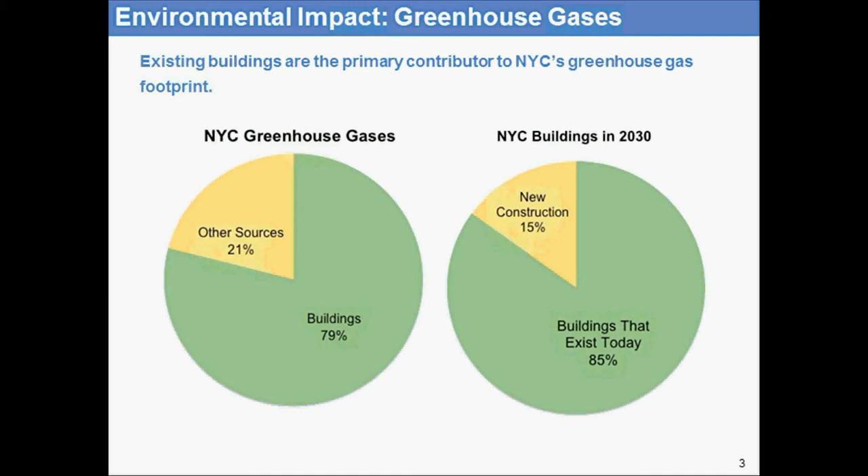Now, as for Clean Heat, the New York City Community Air Survey in 2008 discovered that eliminating number 6 and number 4 heavy heating oils is one of the highest impact strategies we can undertake to improve New York City's air quality. Now, to put this in a little bit of perspective, the soot pollution, or the PM 2.5 emissions, from just the 1% of buildings in New York City that still burn heavy fuel oils is equivalent to all the car and truck traffic emissions in the city. So really, this is public health and well-being that's at risk when we burn heavy fuel oils.

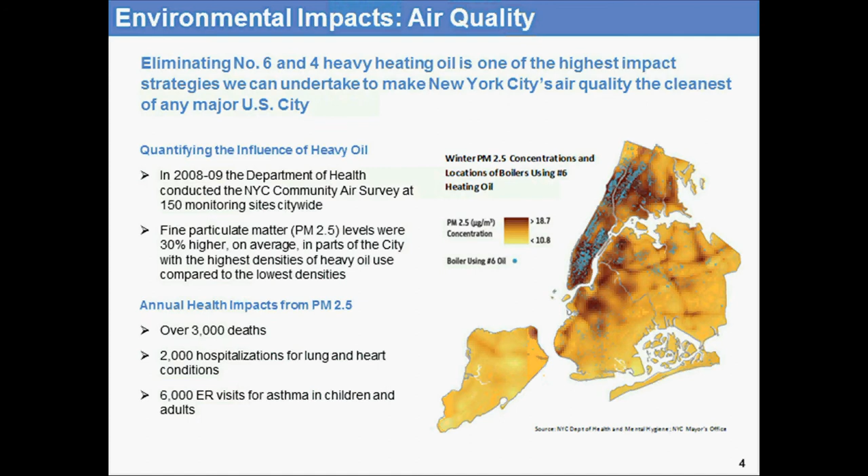So now we're going to get into a little bit more specifics about what Local Law 87 and the Clean Heat laws are. Local Law 87 is part of a package of 4 laws known as the Greener Greater Buildings Plan, which were enacted in December 2009 to improve the energy and water efficiency in New York City's largest buildings. In order of compliance timeline, these laws include Local Law 85, New York City Energy Conservation Code, for all new projects breaking ground starting in 2010. Local Law 84, the benchmarking law, which requires buildings to annually report their energy use. This started in 2011. Local Law 87, the Energy Audits and Retro-commissioning law, which we'll be talking about today. First compliance year is this year, 2013. And finally, Local Law 88, which is about lighting upgrades and sub-metering, which requires compliance by 2025.

So what exactly are the Energy Audit and Retro-commissioning? An energy audit is a systematic analysis of a building's energy equipment and its systems, envelope, and operation, which identifies cost-effective opportunities to save energy. Local Law 87 requires the energy audit, but does not require property owners to follow the recommendations in that audit. The energy audit is going to include interviews with operating personnel, review of utility bills and other operating data, and detailed analysis of energy consumption for all base building systems.

Retro-commissioning, on the other hand, is the testing and tune-up of existing building systems to confirm that they're operating as they should be and in the most efficient manner possible. The retro-commissioning will identify maintenance, calibration, and operations errors that are easily corrected and typically add up to significant energy savings, as well as improve equipment reliability. Local Law 87 requires the retro-commissioning as well as fixing any deficiencies found in the retro-commissioning. In order to meet the requirements of Local Law 87, you have to file an energy efficiency report that includes both the energy audit and the retro-commissioning report.

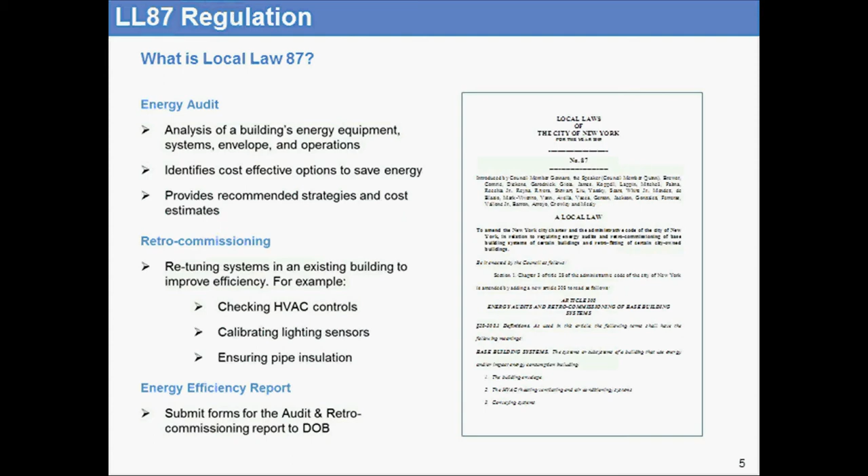Great. So we've talked a little bit about the health impacts of heavy fuel oils. So to respond to this and to balance those health concerns with cost minimization for the buildings that are burning these heavy fuel oils, DEP is phasing out heavy oils in 2 stages. The first stage started last year in July and is focused on number 6. So DEP no longer approves certificates of operation for number 6 systems. That means that no new systems burning number 6 can be permitted at all. In addition, these permits cannot be renewed for existing number 6 systems. So over the next 3 years, as these permits come up for renewal, these buildings will have to move to a different fuel. They can no longer burn number 6. Now, phase 2 really focuses in on number 4.

Number 4 will be completely eliminated by 2030. The permits will not be renewed. But another thing to note here is that it's 2030 or whenever a boiler or burner needs to be replaced.

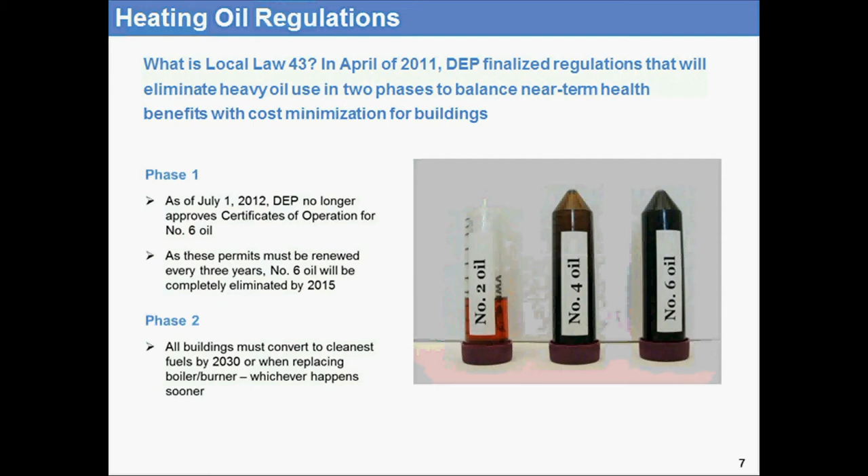So to help buildings with this process, the Mayor's Office set up the Clean Heat program. We provide technical assistance directly to buildings. We work one-on-one with you to understand how the system conversion process works and help connect you to resources. We liaise with the utilities and different industry leaders to make this process as smooth as possible.

We also help buildings connect with financial assistance that's available to them through Clean Heat, something we'll be going into more depth later. We also have a website, nyc.gov/cleanheat, where you can learn about the health impacts, more details on the conversion process, the financial partners, lots of different types of information.

We also have a great account management team that, again, will work one-on-one with your building to help you through the process. Feel free to get started with us by emailing info@nyc.gov. You can also simply call 311 and ask for NYC Clean Heat, and they'll connect you to us.

So now that we've gotten a little introduction to both of these programs, we want to talk to you about why you'd want to do these together and in conjunction. And really, this is just a benefit to you, both in terms of cost, convenience, and definitely the environmental impact of your building. So first of all, help you run a more efficient system. And retro-commissioning audits will show you the hotspots of energy use in your building and how to eliminate them.

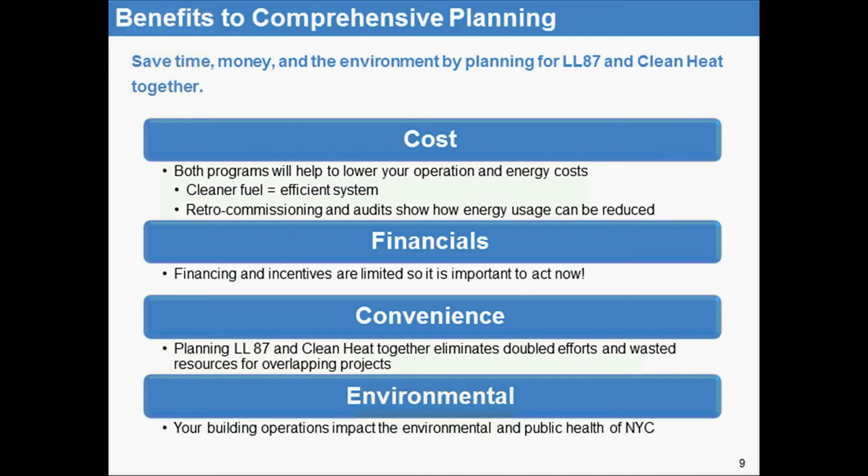So now we'll talk a little bit more about the actual planning and construction for both of these programs. All right, so the first thing I'm sure everyone wants to know is how do you find out if your building has to comply with these laws? As Laura mentioned, 65% of the Clean Heat buildings are also going to have to comply with Local Law 87. So there's a good chance that if you're converting your fuel oil, you're going to also have to do your energy audit and retro-commissioning for compliance with Local Law 87.

That said, the details about what buildings have to comply are slightly different for the 2 laws. I'll just go over them quickly. If your building is over 50,000 square feet, or you have 2 or more buildings either on the same lot or held in condo ownership that together are more than 100,000 square feet, you have to comply with Local Law 87. The square footage for this law is based on the gross square footage using Department of Finance square footage as a general rule of thumb.

And a list of buildings covered by the laws is available on the Mayor's Office website at nyc.gov/LL87. Clean Heat, on the other hand, applies to single buildings on a lot over 40,000 square feet, whose heating systems use the heavy oil, number 4 or number 6, as the primary fuel source, and the heating system is permitted by DEP.

So if you're questioning whether or not you have to comply with Clean Heat, we put together this Spot the Soot map, which is a very handy resource, especially good for owners and managers wondering whether or not their buildings must comply, but also for contractors who are possibly looking for buildings that have to comply.

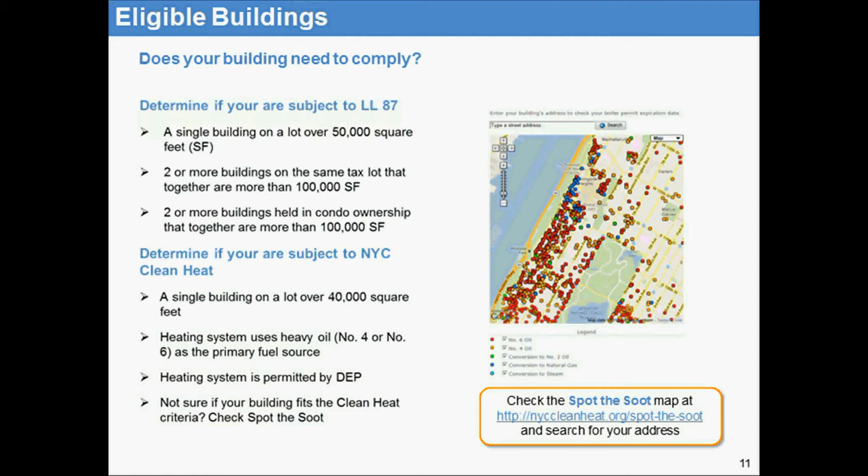Local Law 87, on the other hand, is on a rolling cycle. Every 10 years, your building will have to comply with Local Law 87, and the compliance year is based on the last digit of the building's tax block number. That last digit of the block number corresponds with your reporting year. So, for instance, if your block number ends in a 6, your first reporting year is 2016, and then subsequently 2026, 2036, and so on.

You do have the option for early compliance under Local Law 87, which means that no matter what your reporting year is, you can choose to file in 2013. There are a couple of advantages. I'll name a few of the big ones. The first is that there are currently generous tax and utility incentives that may not exist in the future years, and you really do want to try to take advantage of those as soon as possible. Second, also financially related, the sooner you implement your energy efficiencies, the longer you will, of course, benefit from them.

And finally, noting that all heating oil conversions have to happen off of number 6 by July 2015, if you're in a later compliance year, there's a huge incentive to comply early and do these two things together. One thing to note, though, is that we'll get into more of the scheduling of the Local Law 87 initiatives later, but if you are deciding to comply early in 2013, you really want to start this process now.

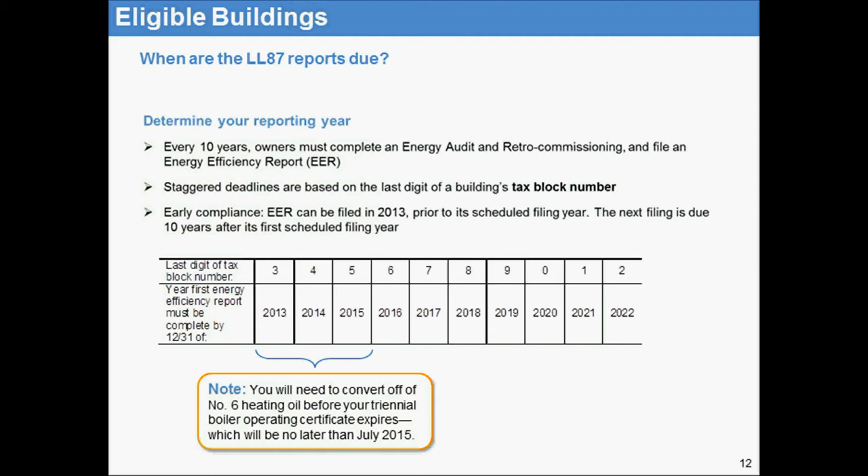So the first step in participating and complying with Local Law 87 is to select your Greener Greater Buildings Plan Administrator. This is someone who you assign to manage the process towards compliance, and it should be someone who has a strong understanding of the building operations. This will help you get maximum value out of the energy audit and retro-commissioning.

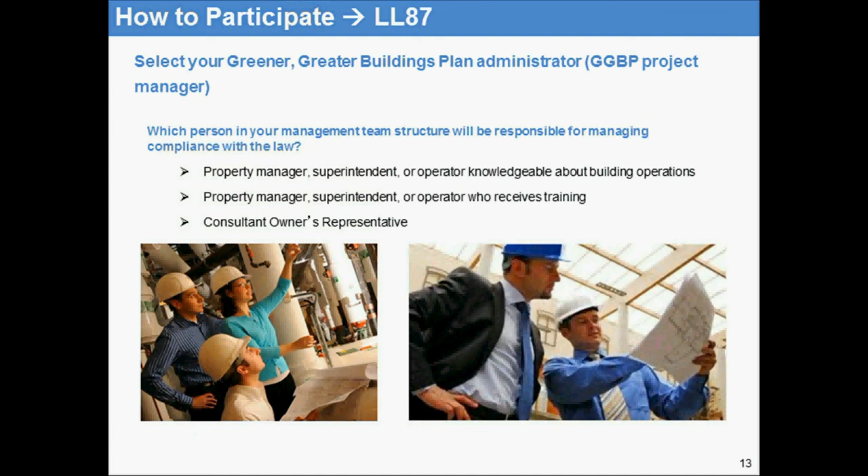The second step is deciding whether or not to do your energy audit at the same time as retro-commissioning. There are some advantages to combining, but also advantages to doing them separately. Just to go over the advantages of combining them quickly, the staff in your building will spend less time collecting information required for the retro-commissioning. Consultants may offer discounts for doing the two together, and doing them together helps ensure that the capital projects are actually necessary. So, for instance, equipment that an audit may flag as underperforming and a target for replacement could see its life extended through retro-commissioning.

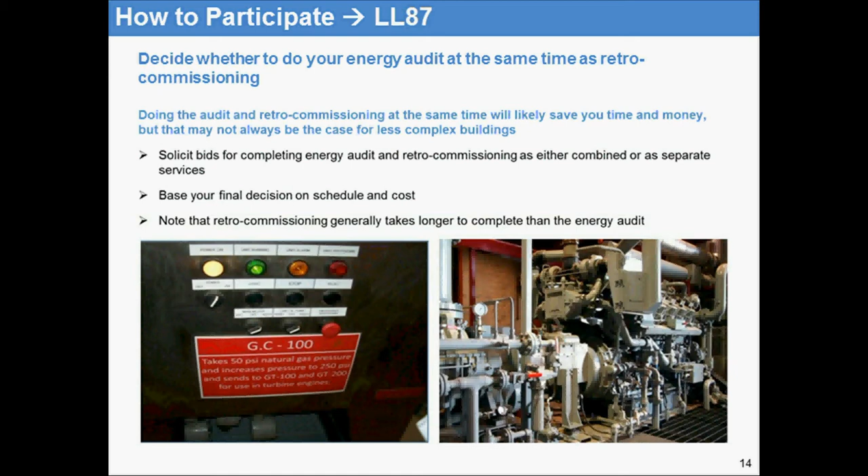On the other hand, it's helpful to benchmark the performance of the building as part of the audit before you do any retro-commissioning to quantify the energy savings of all the recommendations.

Step 3 is to search for and select a qualified retro-commissioning agent and begin the process of the retro-commissioning. So retro-commissioning covers 28 measures. They're outlined in the letter of the law, and they ensure that your heating, cooling, lighting, and water systems are all operating in line with current facility requirements, and that all of these systems are tuned for optimal efficiencies.

As I mentioned earlier, you are required to correct any deficiencies or non-compliant issues prior to submitting your energy efficiency report at the end of your compliance year, and you should definitely build in time to do that. Most of these deficiencies should be low or no-cost repairs. That is the intention of the law, so hopefully that will be the case for your building.

When you're scheduling this, note that the timing depends a lot on the season. If you have both heating and cooling equipment in your building, you're going to need to build in time to do the retro-commissioning in a heating and a cooling season. So it could take up to a year to perform the entire retro-commissioning process.

The retro-commissioning agent qualifications are spelled out in detail in the law. I'm not going to go into them here because we don't have enough time for that. But a few takeaways are that the agent must not be on the building staff, and the agent either has to be a licensed architect or engineer or registered with the Department of Buildings, as well as hold some certifications that make them qualified to do the retro-commissioning.

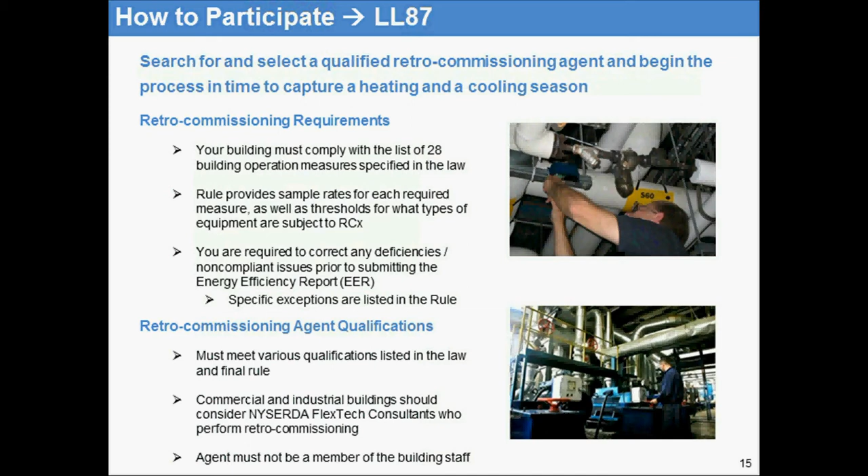On the energy audit side, again, you want to select, obviously, a qualified energy auditor and begin that process as soon as possible, especially for early compliance. The energy audit itself is going to have to be at least as stringent as ASHRAE Level 2, which basically means that you're going to interview operating personnel, review utility bills and other operating data, and get a detailed analysis of energy consumption for the base building systems.

Your contract should also include a requirement that the report provide information on available incentives for each energy conservation measure recommended. In terms of thinking about your energy audit and retro-commissioning together, again, think about the seasonality of when you're testing the equipment, and also know that the energy audit and retro-commissioning can be completed up to 4 years prior to when the building submits its energy efficiency report.

The auditor requirements are pretty similar to the retro-commissioning requirements, except that the certifications are slightly different. So take a look at the law and see what those certifications are. But again, your auditor needs to either be a licensed architect or engineer or registered with Department of Buildings.

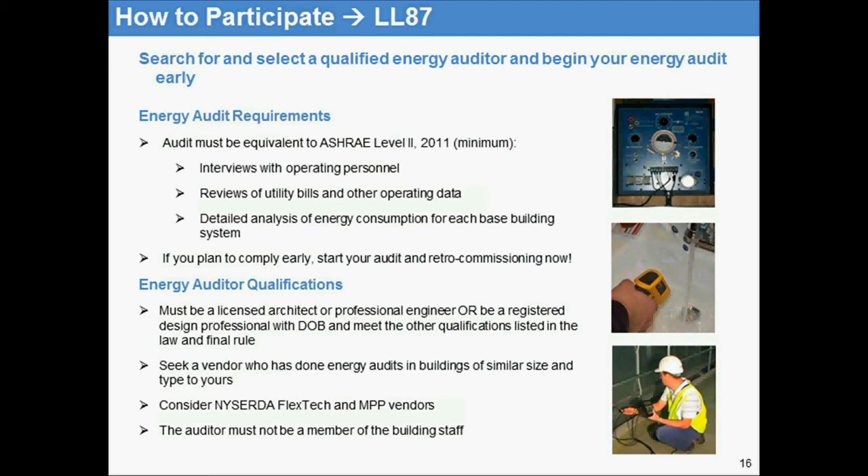And the final step in participating with Local Law 87 is to submit your energy efficiency report and pay the filing fee by the end of your reporting year. Those forms and the filing fee are not yet disclosed by Department of Buildings, unfortunately, but we've been told that within the next month or two they should be available for review. Obviously, the filing fee will be less expensive than the fees for not complying.

So if you don't comply, DOB is enforcing this. You will be fined $3,000 for the first year and $5,000 for each subsequent year if you do not submit your energy efficiency report. If you do submit it and you comply with the law, you want to make sure that you maintain your records for at least 11 years from the required submission date, because Department of Buildings will be auditing your audit randomly. So you want to make sure that you have all of the records of who did the audit, who did the retro-commissioning, and the results of those two exercises on site at all times.

Great. So now we're going to talk a little bit about how you can participate with Clean Heat, and you're going to see that there's actually a lot of opportunities to overlap with the work that you're going to be doing for Local Law 87. So first of all, before you do anything, just assess your current system. And definitely, as you can probably guess, your Greener Greater Buildings Plan team should be able to help you do this when you're conducting your audit.

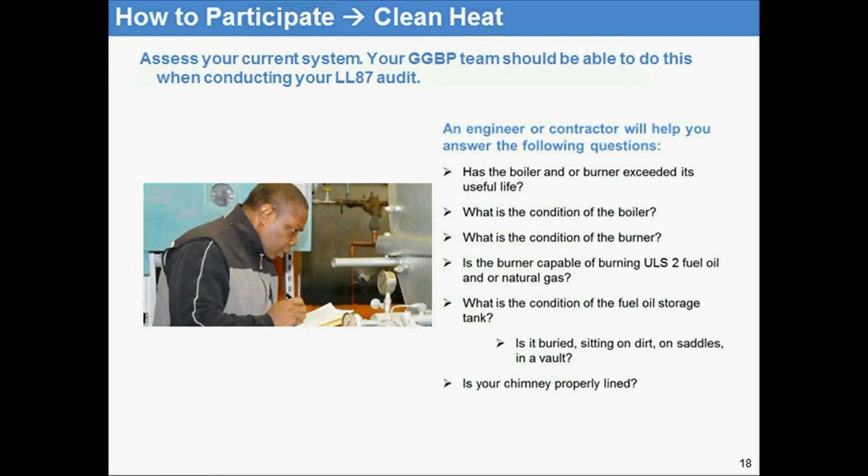So things that you're going to want to look at with your engineer, contractor, auditor is the life, the age of your system, your boiler and your burner, the current condition that both of those things are in. Also good to note is that many burners on the marketplace now burn both oil and gas, so that's something you're going to want to look at. Also, if you're thinking about an oil-to-oil conversion, you're going to have to consider the condition of your tank and the location of your tank in the boiler room. If you're thinking about gas, you're going to have to consider how your chimneys are lined. So some initial thoughts to kind of have with your team.

The next step is to select your target fuel. It's important to know that Clean Heat is a fuel neutral program. We'll help you move on to anything pretty much unless it's number 4 or 6. So some of the most common fuels that we work with are ultra-low sulfur number 2 fuel oil. Oftentimes this is blended with biodiesel to different grades. So B5, B20 indicate the percentage levels of biodiesel. So B5 is a 5% blend, B20 is a 20% blend, and so on.

Natural gas certainly is another fuel that we see a lot. Steam is available to some buildings in New York that need to comply with Clean Heat. And of course, we'll help you assess other alternatives, such as geothermal or cogeneration.

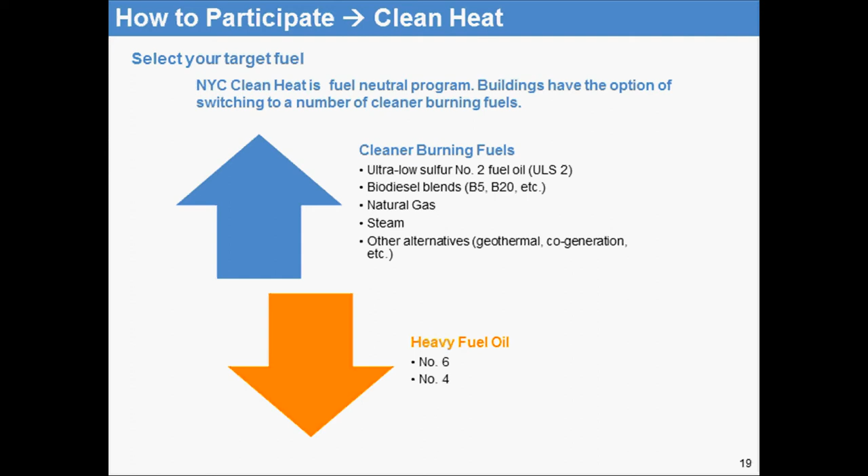So we don't have time now to go through every single nitty-gritty step of the conversion process and the construction and all that. But here's just some top-level things that you'll have to do when converting to the two most common fuels, natural gas and number 2.

So to start with natural gas, the first thing that you're going to have to know and consider is that the planning and construction period will take 6 to 9 months, even upwards of a year. So you have to think about that in terms of your own internal resources, as well as just the construction and planning period. So the first step that we recommend is to contact Clean Heat. We are working very closely with the gas utilities, and we'll be able to help give you some initial understanding of the gas availability in your area. We'll also help you connect with all the resources that are available to you, and answer any of the technical questions that you might have.

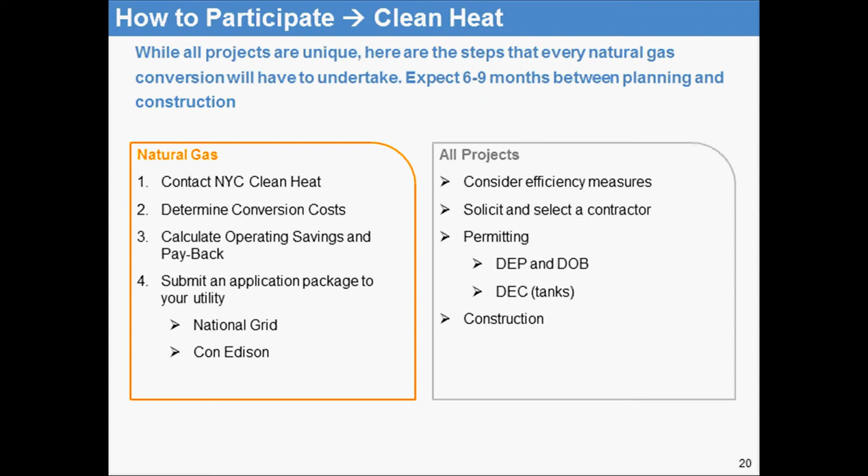Second, you want to determine your conversion costs. So again, something that your local LL87 auditor might be able to help you with. Come in, assess your system, see what would need to be swapped out or changed. They also will help you figure out what your operating savings and payback period will be. And finally, once you have all of this put together, you'll submit an application package to your utility, which will be National Grid or Con Edison, depending on where you're located in the city.

Now, when you're thinking about oil-to-oil conversions, the big advantage here is that the planning and construction period is much shorter. We're talking 4 to 6 weeks start to finish, and a lot of times construction can happen in as little as 1 day, which means that you can do it even during the heating season if you want, but certainly right after. So the steps are somewhat similar. First, you again want to contact Clean Heat, to make sure that you are as informed and as connected to all the resources as you can be. Second, you want to determine your conversion costs. So again, bringing a qualified professional or your local LL87 auditor out to take a look at your system.

You also want to think about who's going to be supplying your oil. Contact your current supplier and see if they carry biodiesel blends, get their rates. Also, oil is a very competitive market, so you might want to shop around a little bit. You may get different prices from different suppliers. Also, definitely consider biodiesel. You can take advantage of the tax credit. It burns very cleanly. And then the last thing you want to do is understand your operating costs.

So when you convert to a cleaner, lighter fuel oil, you'll see improvements in your boiler maintenance. You may be able to take advantage of tax credits, again, through the biodiesel, and energy efficiency measures that you implement that affect your thermal load are definitely going to help you burn less oil and save you money. If you're looking for biodiesel suppliers, this link on the bottom of the page here, bioheatonline.com, has a great resource for you to find local dealers that you could work with.

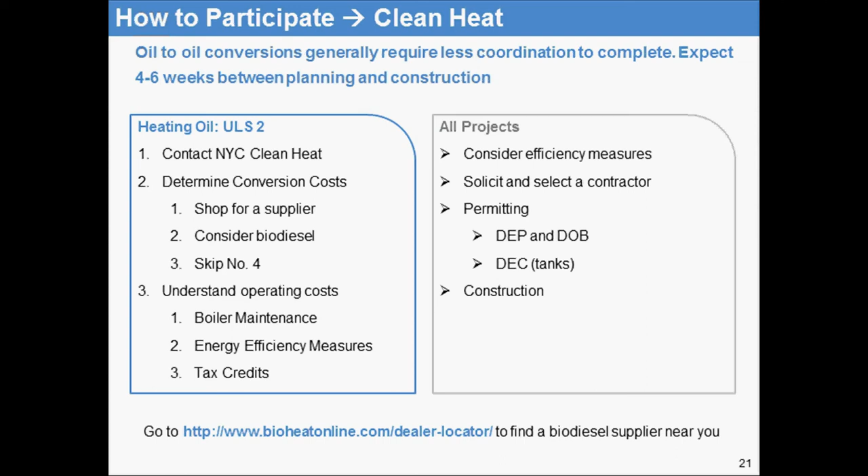Okay, now we're going to talk a little bit about the financial resources that are currently in place to help with compliance. We understand that although you should see operating and maintenance savings by implementing Local Law 87 initiatives, as well as switching out your oil, you do need help sometimes funding the initial compliance. So this slide just gives an overview of what we'll be going over in a little bit more detail later, but we recommend that you go directly to Con Edison and NYSERDA's websites for the incentives based on Local Law 87, and then visit Clean Heat's website for incentives for Local Law 43 or the Clean Heat program.

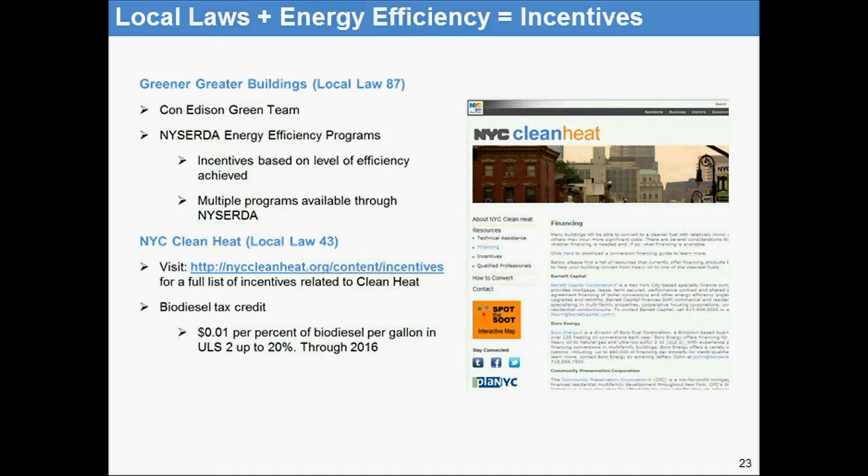This slide goes into some greater detail about the commercial, institutional, industrial, and data center incentive programs available from Con Edison and NYSERDA for Local Law 87. Again, I'm not going to go into detail about this, but this slideshow will be available on Clean Heat's website if you want to refer back to it for more detail. Some things to note as an overarching comment is that you must pay the system's benefit charge in order to qualify for all or any of these incentive programs.

The NYSERDA FlexTech program, the funds are currently available through the end of 2015, so another reason for complying early. These incentives are not going to be available forever. And then on the Con Edison side, you must be a Con Edison customer to apply for any Con Edison incentives. And also note that Con Edison requires an ASHRAE Level 3 audit, which is a little bit more stringent than what's required by the law.

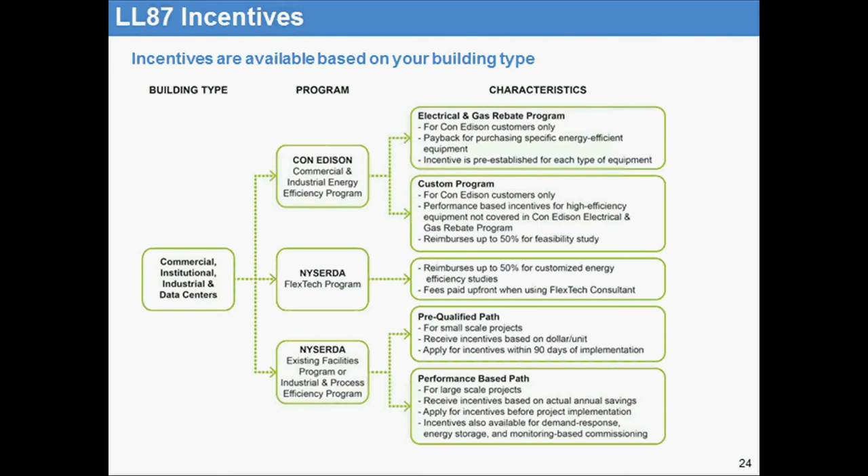On the multifamily side, again, refer back to this presentation if you'd like to really take note of all of the details on this slide about the available incentive programs. But one takeaway and just note is that to qualify for NYSERDA's programs, at least 50% of the building's heated space must be residential.

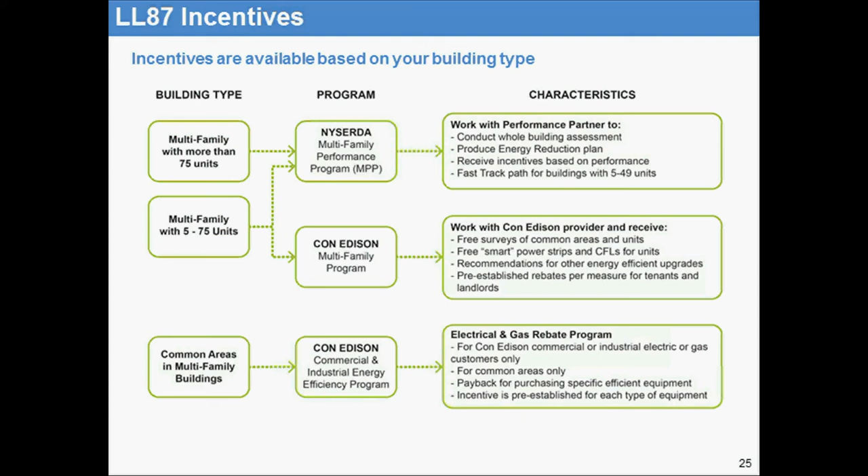Great. So, for Local Law 87, we're really talking about incentives based on different types of protocol for energy efficiency. With Clean Heat, we're talking about financing. So in June of last year, Mayor Bloomberg announced more than $100 million in financing for buildings participating in Clean Heat to help with conversion costs. Much of this is run by the New York City Energy Efficiency Corporation. We call them NYCEEC for short.

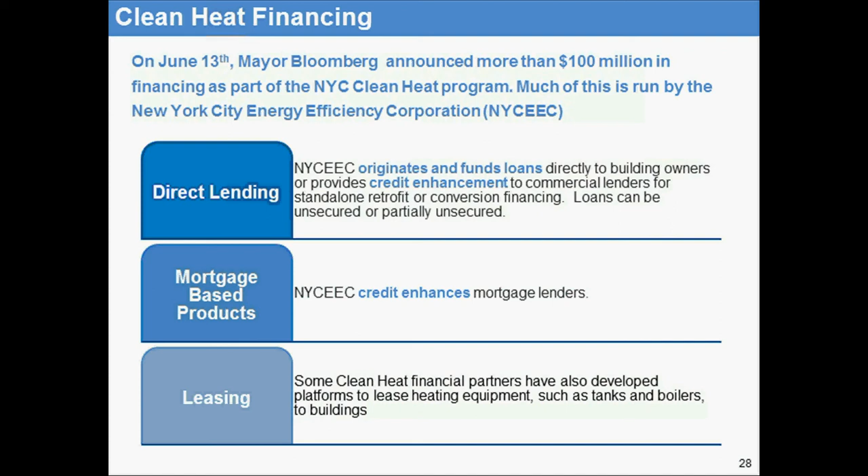So this financing comes in three basic categories. The first is direct lending. So NYCEEC both originates loans as well as provides credit enhancement to commercial lenders. NYCEEC also credit enhances mortgage lenders for mortgage-based products. And finally, leasing is something else that some of our partners provide, and this is really for equipment replacements for buildings that, for whatever reason, do not want to take out a loan and do not want to look at their mortgage as a resource for financing.

But something that's interesting to note is that some of these financial platforms do also require energy efficiency upgrades, and a lot of the information that they're going to ask you for, you're going to get in your Local Law 87 audit report. So this is a great way to overlap this and be able to tap into both financing and incentives.

All right, and finally, we'll just leave you with a few takeaways to maximize benefit of doing both of these programs together. So on the energy audit side, our biggest recommendation is to not only do it to comply with the law, but use it as a way to develop an action plan for future upgrades. We do recommend that you implement all low and no-cost energy conservation measures as soon as possible, but then use that energy audit as a capital planning tool for the next fiscal year or upcoming fiscal years.